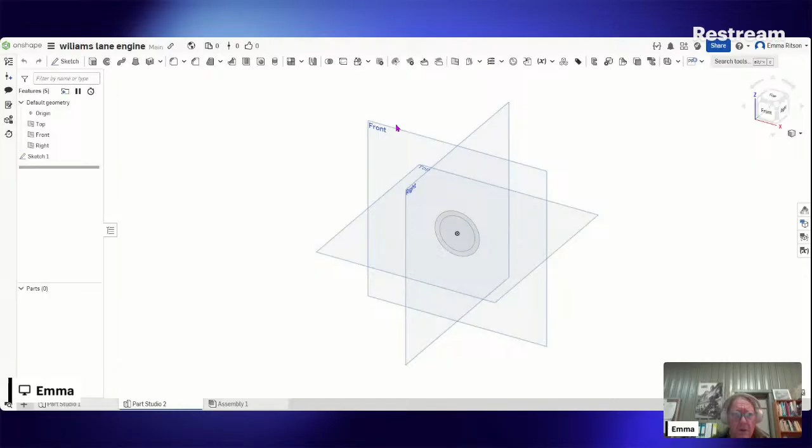Why hasn't that refreshed? We're not getting a refresh there. Why is it so? For some reason we're not getting a refresh here. Start with that, not sure what the story is there, but it doesn't seem to be refreshing nicely. It's a bit strange.

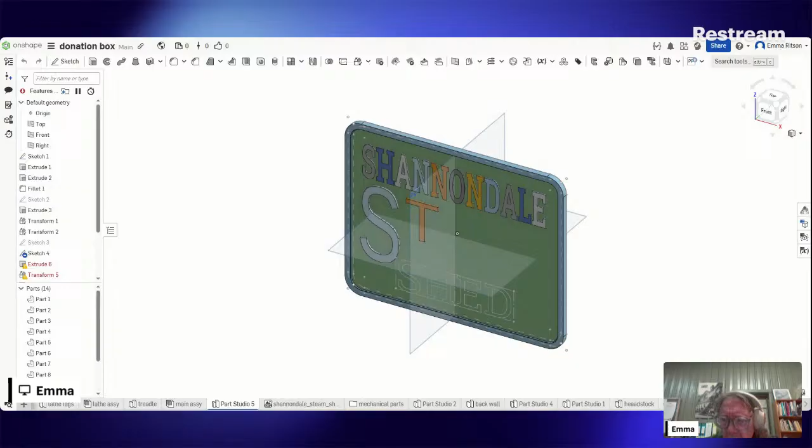Now, looking at it, we need an aluminium plate or brass plate or something on this box. I had some thoughts about it, and this was quite some time before we designed a logo for the Shannondale Steam Shed. I've sort of got this, which I don't really particularly like.

This is sort of the look that we're going for. What I'm going to do... I really appreciate you tuning in everyone, because this is sort of where I'm at, is that I'm struggling to get back into projects like this.

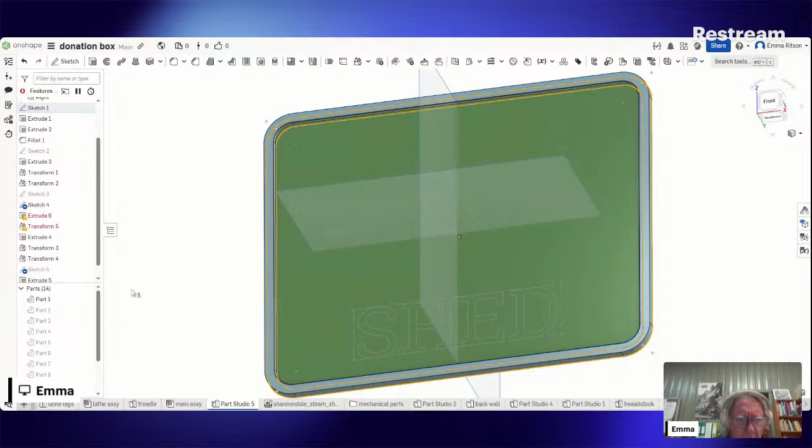I think if I do this, that's probably fixed it, has it? I hope so. I'm not making progress here at a rapid rate, actually, is what's happening. Hopefully I fixed it, I think we're all back where we started. And we got rid of the clicky sound, which I believe to be... hopefully the noise has disappeared.

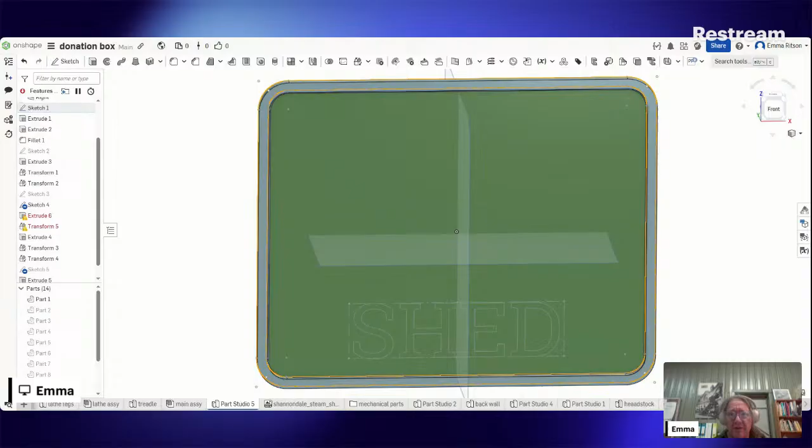Really appreciate you guys taking time to watch, because these are things that I don't get to. Now, we need a plate about this size, cast in aluminium, probably be nice enough, or brass maybe if we really were feeling fancy.

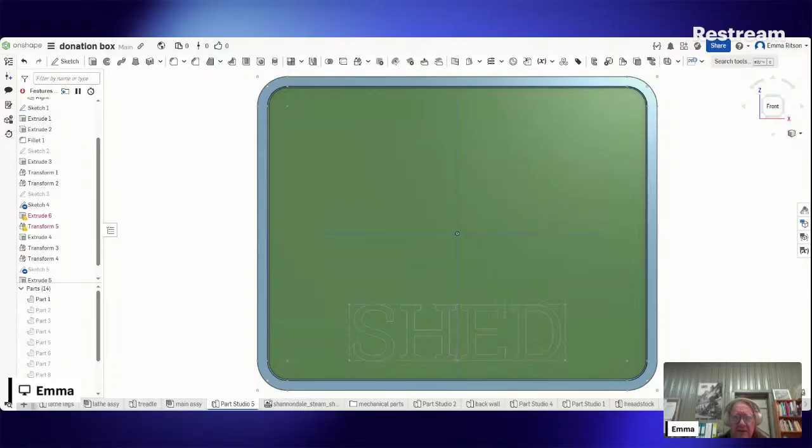And it needs to read Shannondale Steam Shed. Now, I had sort of thought to have sort of a sweepy, word art sort of style thing happening here, but in Onshape I'm not sure how to do that. What we're probably going to do is put another sketch here.

Sure, I like that on a plate that's sort of 6 inches by 5 inches or something like that. It's a very difficult typeface to actually mold and cast, I think.

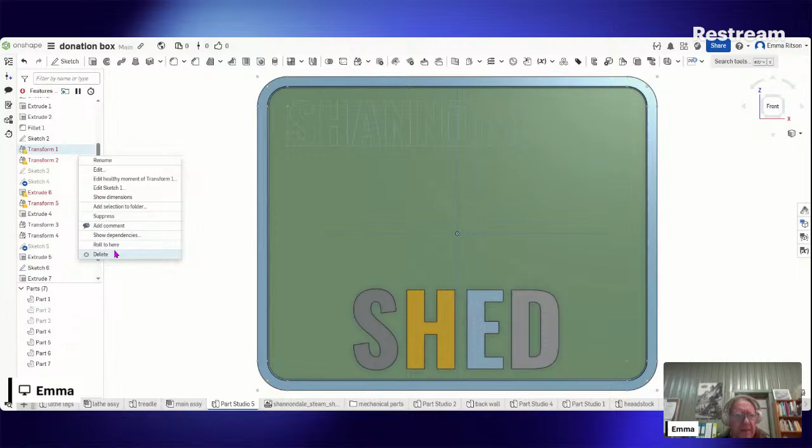Now this transform doesn't work anymore. We delete that, and that one. And if we extrude that sketch properly now, we start.

I haven't looked at this for quite some time. But if we select sketch 2 and extrude it, we only want it out like 2 mil or something, right? As new parts, that changes them all different colours, so you can determine that they are actually new.

And the reason I've done that is so that we can select all these parts here like this. Remember, if we select from right to left, it selects everything that's in the selection. So if I select this here like this, it gets all those things. And if I select from left to right, it only selects the things that are absolutely inside the selection. See?

We click transform. It's asking for a line or point to translate from, which we're going to start with that vertex. Translate, probably want to scale it from there, and click scale uniformly. And our Z scale, we go 1.3 maybe. And that is scaling it upwards, including this distance here, also 1.3.

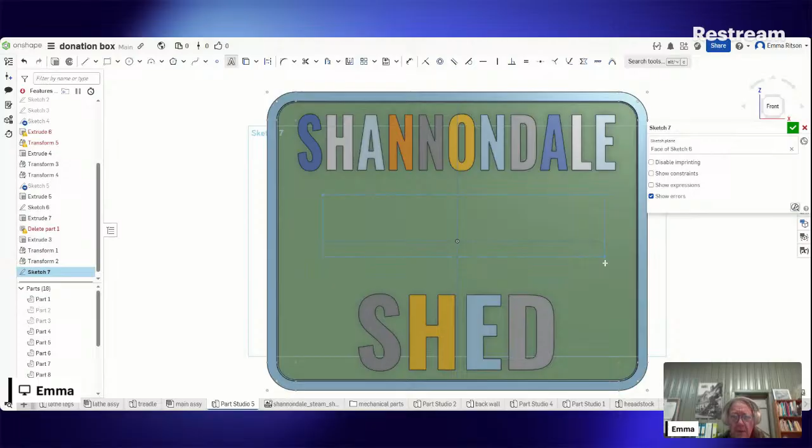I think that that's probably a fairly easy thing to cast, though. Now, what we need to do is put steam in here. So new sketch, we'll bung it straight on here. And we'll put text, something like that. We go STEAM. And in the same font, that's a bit boring, really. Not feeling it.

Just transform that to the center. Move that so that it's sort of on line in the center. That's not terrible. So what I'd like is a little bit more sort of class than that. It feels a bit sort of... feels a bit boring.

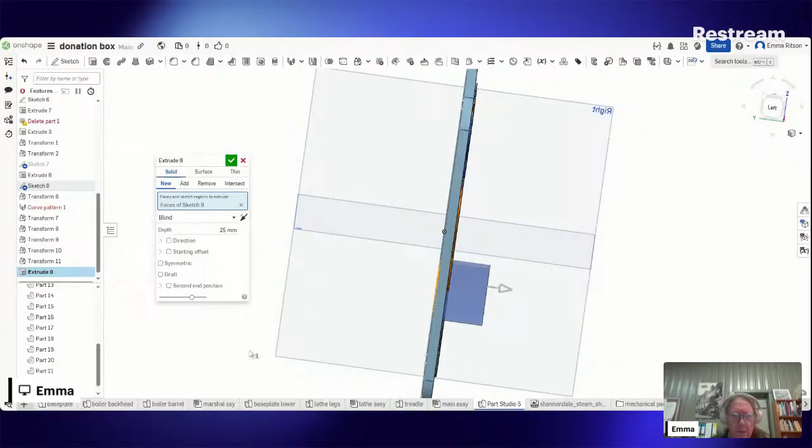TMB's already done one in AI, which is kind of cool. Getting it into a STL from AI is a little bit more complicated, I've discovered, because my first thought to do this was AI, absolutely.

So we use it basically as subtraction. Our tools is this. So we're going to take basically part 24 away from that one, that one, that one, that one, and that one. And there we go.

So it's done that, and it looks quite good, I think. I don't think that's terrible at all. This one here could be a fraction bigger, because S's tend to like to be a fraction bigger. That was transform 7.

Let's see if that makes a difference. What it's going to do there is put a flat point on that, which isn't really good. So if we do this, and targets, which is part 19, if we remove part 19 from the targets, that looks much better.

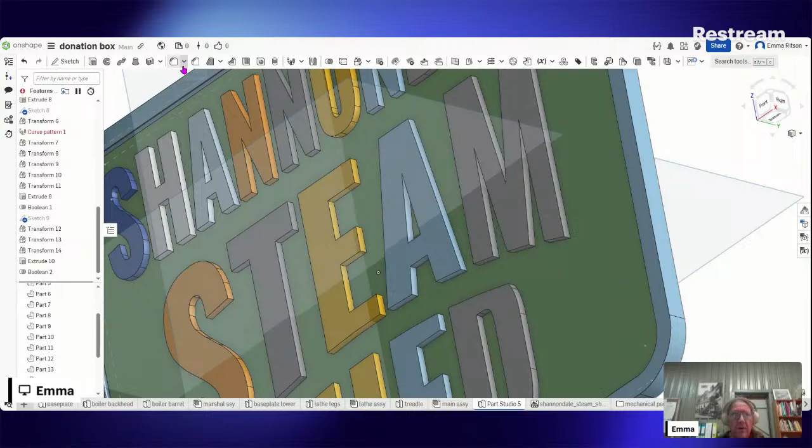It's not ideal, but because these are no longer text, we can modify them a little bit. So here, what we can do is put a fillet on here. It's probably as good a time and place as any.

We can't do it that way. So we need to put a bit of a curve in here. So a new sketch. Our sketch plane is going to be, we'll just do it this way. We're going to the front sketch plane. We can select it there as well as we can click on it.

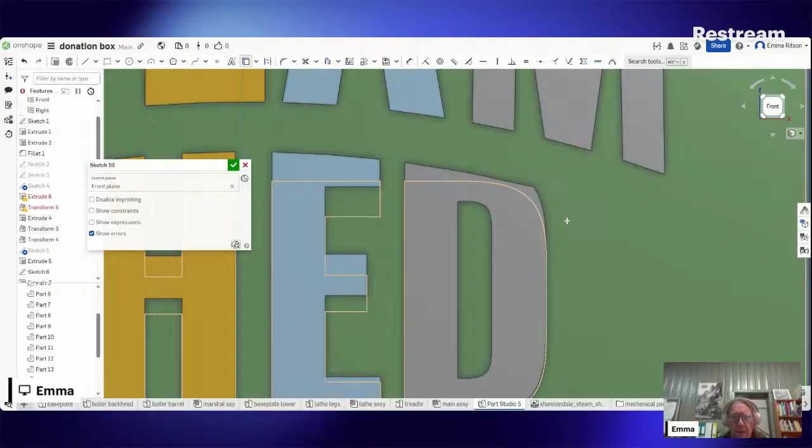And we use... which we can't do for some reason. Anyway, that's all right. If we go up here like this, and we're just guessing here because it'll be close enough and there shouldn't be too many issues with it.

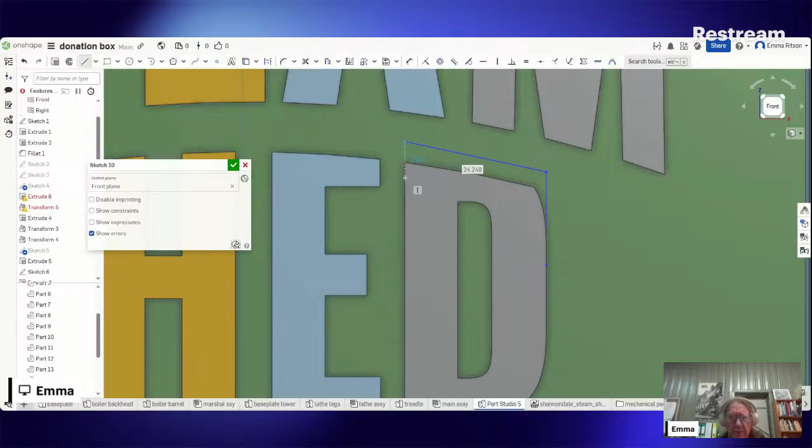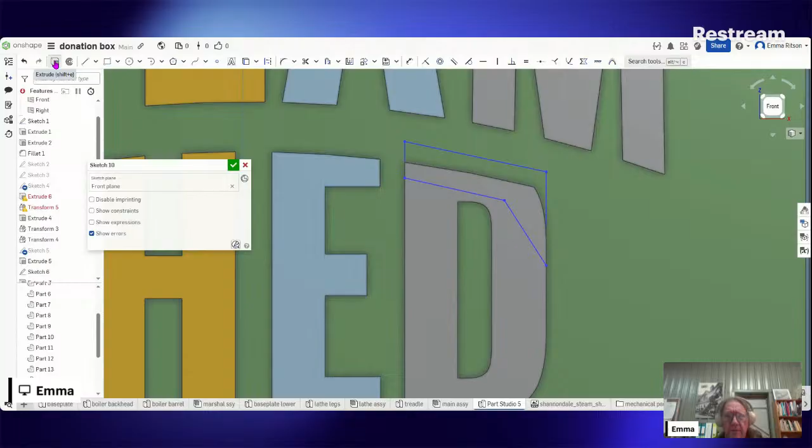We make a shape like that. And we extrude it. That didn't work. Why didn't that work?

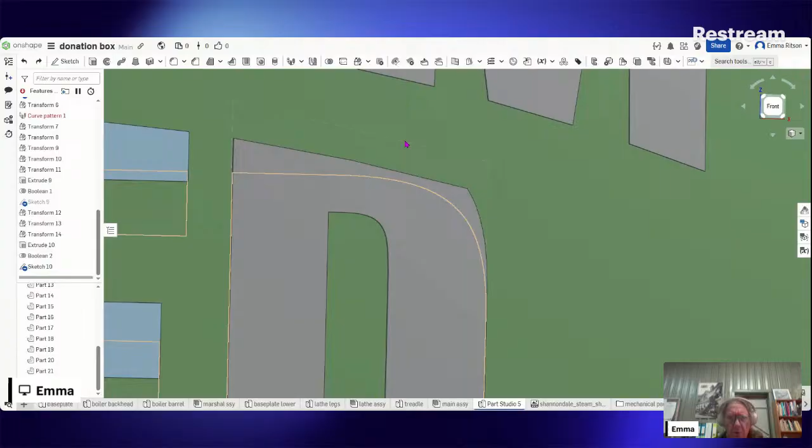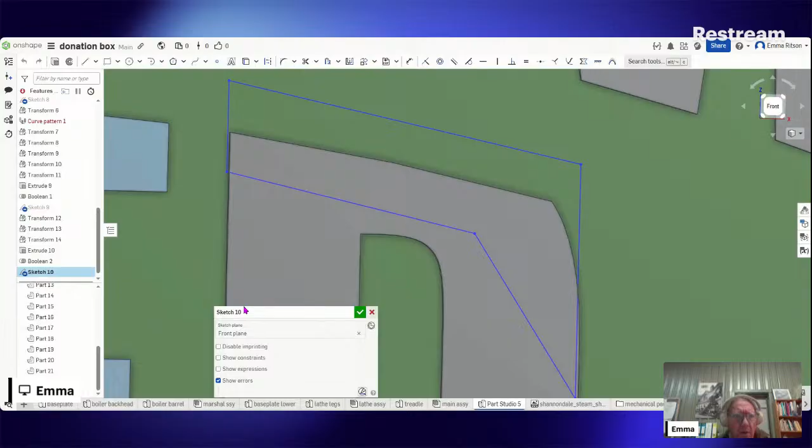There's sketch 10. Why is sketch 10 not joining up? Yeah, it doesn't join up there. Let's have a look. I guess there's someone still watching. One of these doesn't join up properly. It's not good, and we're going to start this again.

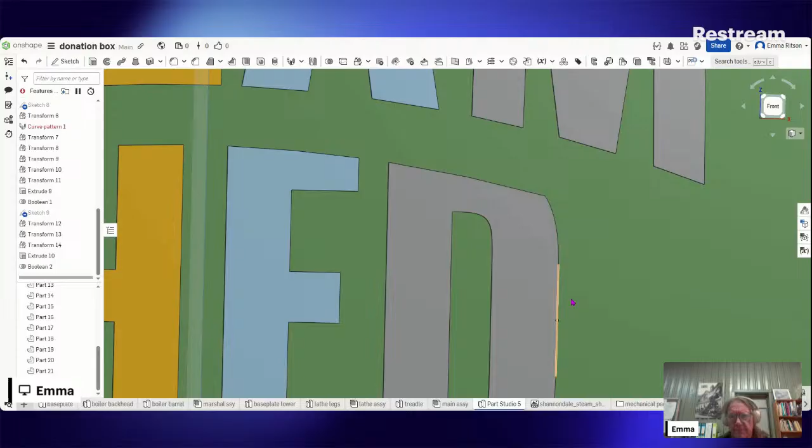What we need to do is put a square corner on here so we can put a fillet on it. If we go on the actual face of that extrusion, that might make it a little bit easier. It does too. Look at that.

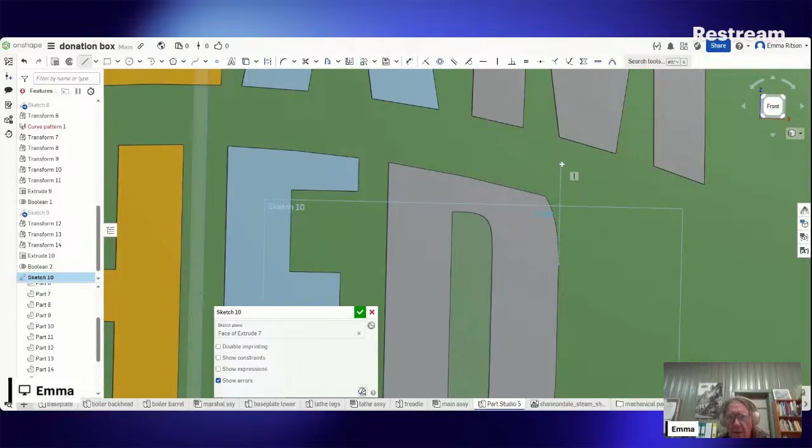There we go. Now we can extrude that. What we find is that it's probably going to extrude out the front rather than the back. You want it 2 mil. We can change the direction with that little arrow.

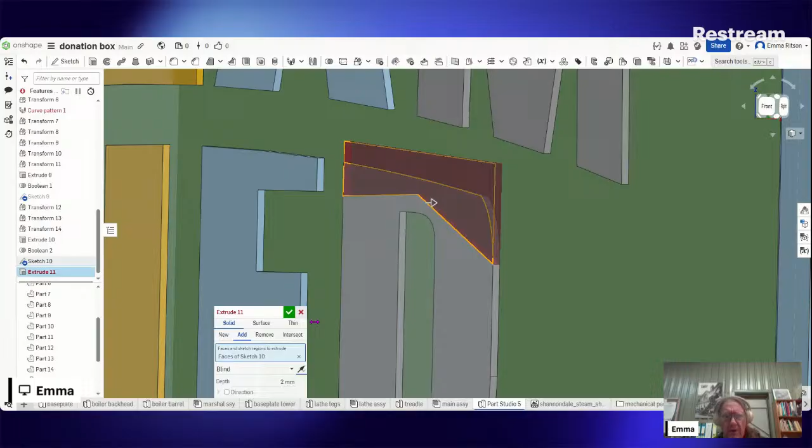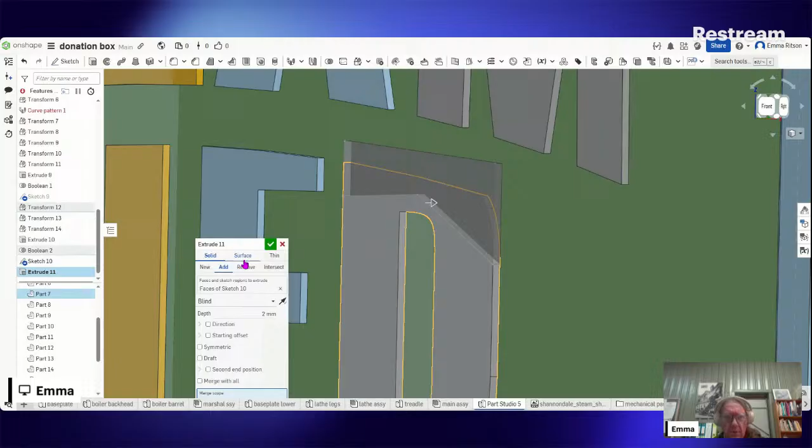Add it to that. And let's fix that. Now, that makes perfect sense, doesn't it? However,

this one here, if we drag this down here past this—there you go—that makes our cutoff later in our sequence of events than our actual masked extrusion. So that fixes that.

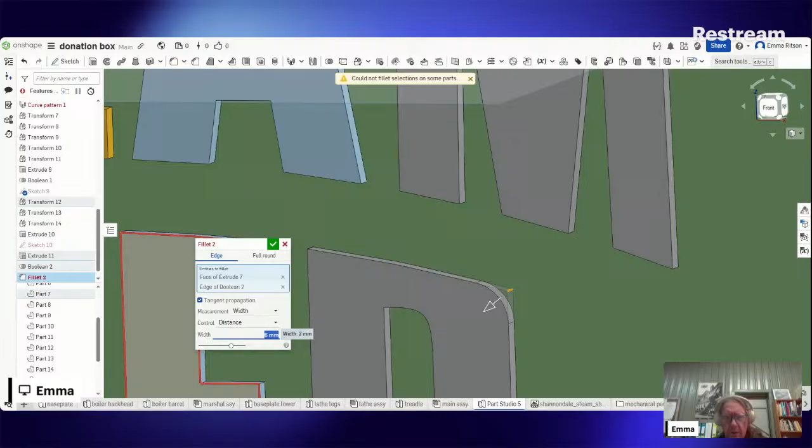And then all we need to do, I believe, is put a fillet on here. Let's have a look at this at the front, see how much it needs. So that's that.

That's interesting. Yes, I can make all the letters the same colour, but the reason they are different colours is that each letter is a separate piece, and that's to determine which part's which.

If we, because we've got this sorted to the point that we kind of like it, we could experiment with that. So basically, we can change them just by changing the colours.

Appearance panel. So we can use the appearance panel here. And we can change them all to grey if we like.

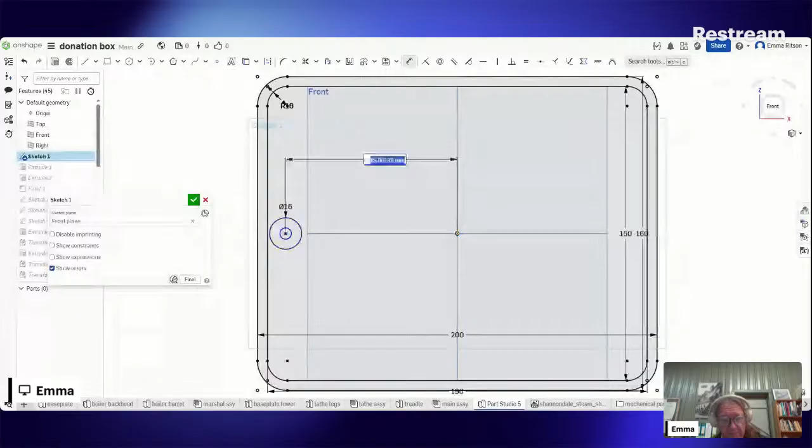And put some dimensions on that. So distance from there to there, I reckon it's 80. Let's see how 85 looks. There we are, that looks good. Might be a bit much.

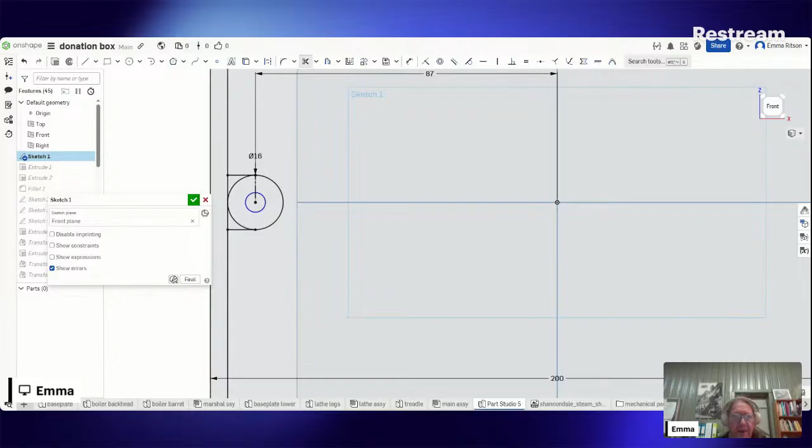That's better. Now if we draw from, put a construction line from the centre of this hole up to this line. Press Q, and then we mirror that. Our mirror line is going to be that one. There we go. Use the trim tool, remove that and that and that.

And then radius is this one. And this one. I reckon 6. Seven maybe. There we go, 7. Let's try with 7.

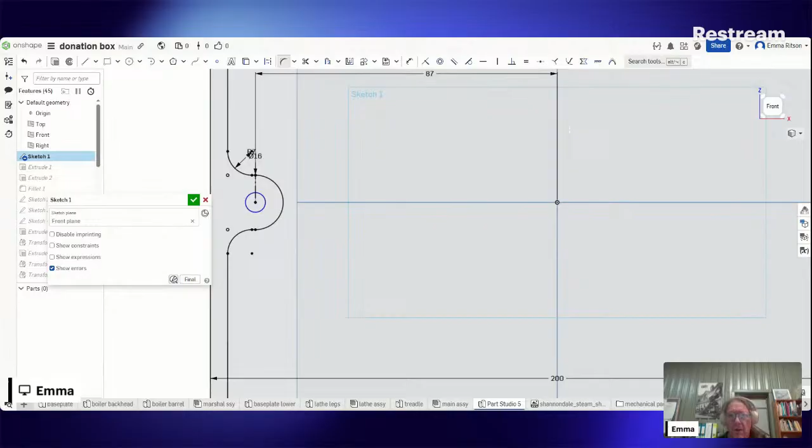Now, let's do some mirror work here. We'll get a mirror there. That one, that one, that one, and that one. And there's 2 little lines in between that won't add up if we don't do that.

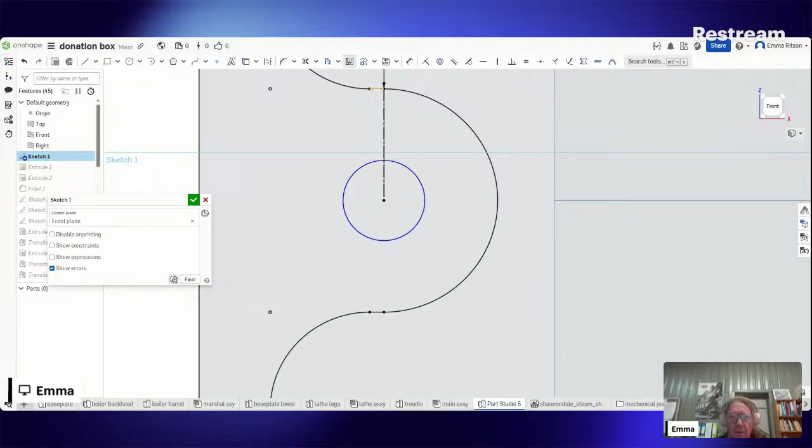And we trim the space in between this one here. There we go. And click OK. That should nearly do that on its own.

But wait for it, and wait for it, and wait for it, and wait for it. It annoys you that the centre of each word is not aligned.

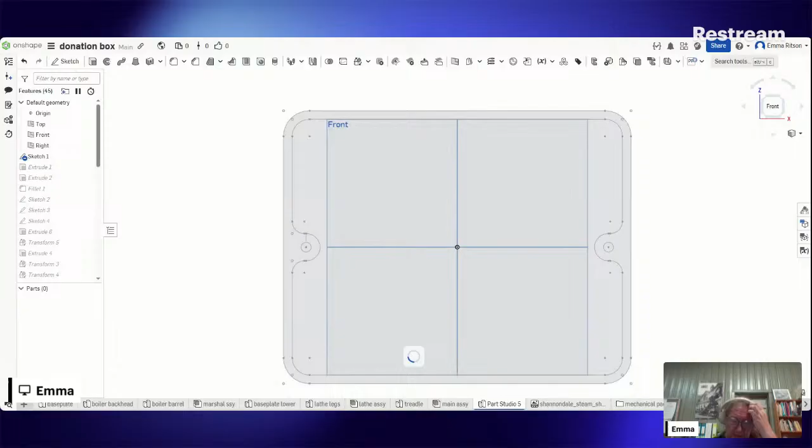Thanks for that feedback. I might have a look at that in a second when we've done this. The centre of each word is not aligned. It's very true. It's because one has 6 letters, one has 4 letters, and one has 11 letters.

Interesting. I wonder what we can do about that. I don't think it's going to work because of our kerning. I just don't think that there's anything we can fix. I don't feel like it's something we can fix.

If we squash down the T and the E and stretch out the A and the M, it's going to look ugly, I think.

No, I'm going to have to sleep on that because you're right. T and B actually absolutely has a point. And now I've seen it, I can't unsee it.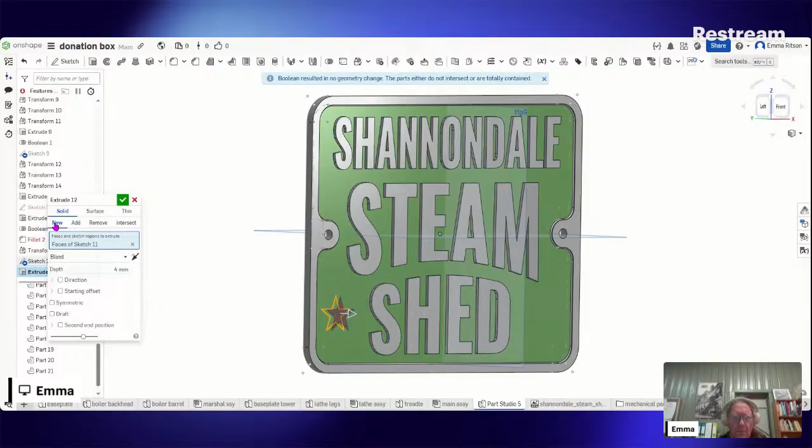Now, this very cool message just popped up. From Matt.

There we go. I'm gonna read that out loud. Just booked for flying out 7th of January, back the 4th of February. So he's here for a month. Vague plans of helping a friend build a carport. So Matt Peterson is coming back to Australia, which is a bit awesome. Caught up with him last time he was here. Be pretty excited to catch up with him again, if that's something that happens.

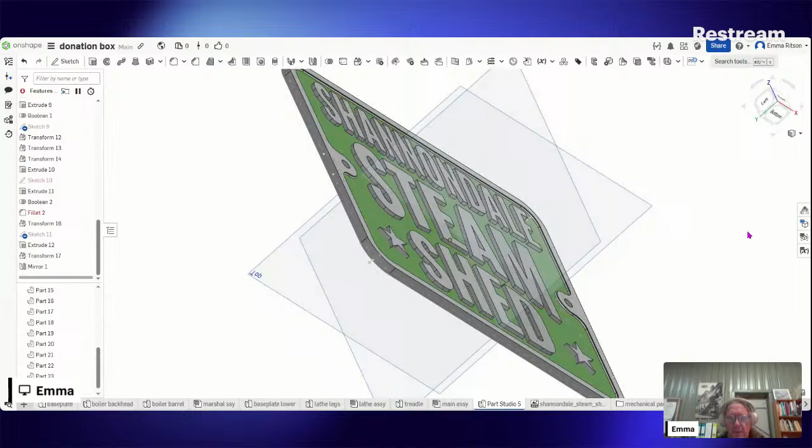So do we like that? I don't know. If we transform, we can do that quite simply. To translate X, Y, Z gives us a little arrow. If we drag that to the top above that mirror line, that changes the other one as well. Now, don't know, do we like it? I think that probably serves very well, and it's probably simple enough and quite good. Don't know.

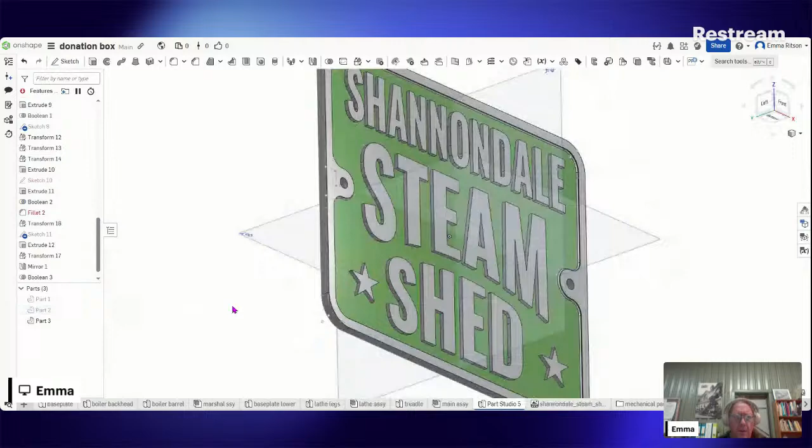If we make basically a union, by selecting everything, and joining them all together, that makes everything one. Come on, my stupid mouse is going to play up now.

The letters are actually extruded further than the actual outer surround, which when you're looking at the bottom, you can see that. It's a fairly simple fix.

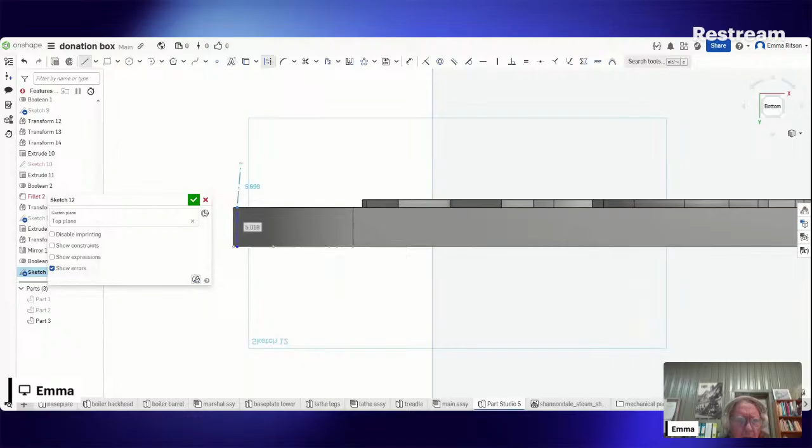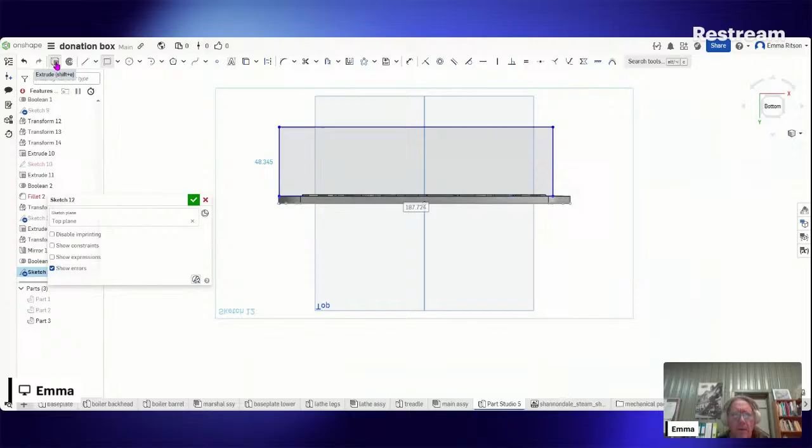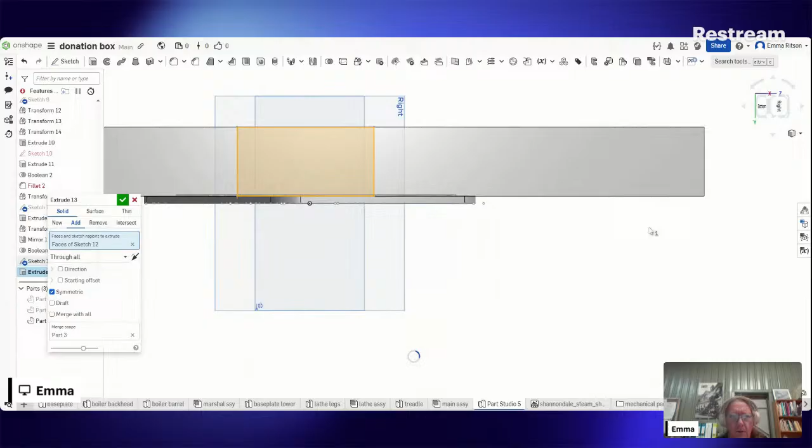It's actually 5mm thick, so we draw a certain box there and extrude it. And we select, instead of blind, we put through all. And we have symmetrical. And we go remove.

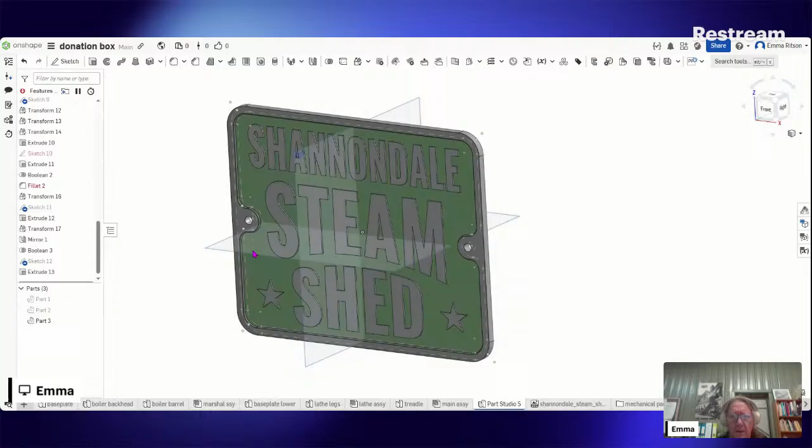Part 3, click OK. Yeah, that's brought everything down to where it needs to be. It's a fairly low relief, but it will cast really nicely in aluminium.

Probably it needs, ideally, a fillet around all those letters. You could add a texture to it, absolutely. That might be really nice. It will have a sand texture anyway, and that might do.

If we were to do it on the CNC router, which might be an easy way to do it in aluminium if we really wanted to, then we could put a texture on it then, but it's a bit of overkill.

I'm probably been up nearly 2 hours later than I should have been, but that might be what we work for, and it's got that sort of carnival-y feel to it, and it doesn't have to be particularly formal on the donation box. But if we got one of them cast in aluminium, I don't think that'd be a terrible thing, and we could just screw it straight to the box.

So to cast it, of course, in aluminium, there are things that it needs. It needs some draft on it, probably. It's only 5mm thick, but like Peter says, it probably needs a little bit of draft on it. I don't think the letters, being only sticking up about 1mm, really need any - I think that'll come out beautifully. But the outside on it probably needs a bit of draft to come out. We'll probably fix that fairly quickly.

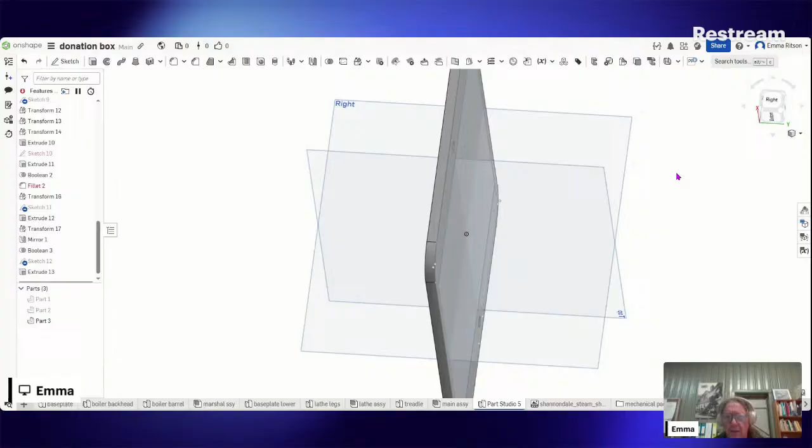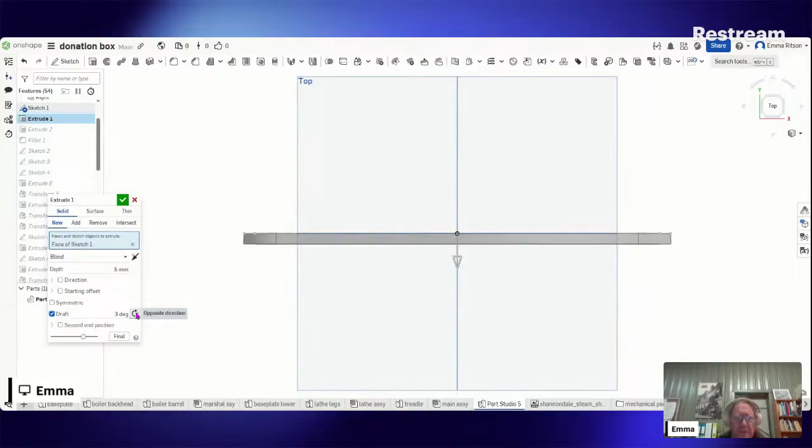If my mouse plays up... Let's Extrude 1, so let's edit that. And we can select draft here. And we don't want it that way, we probably want it this way. Is that right? Is that the right way around? Yeah, let's put a bit of draft on that. Simple as that.

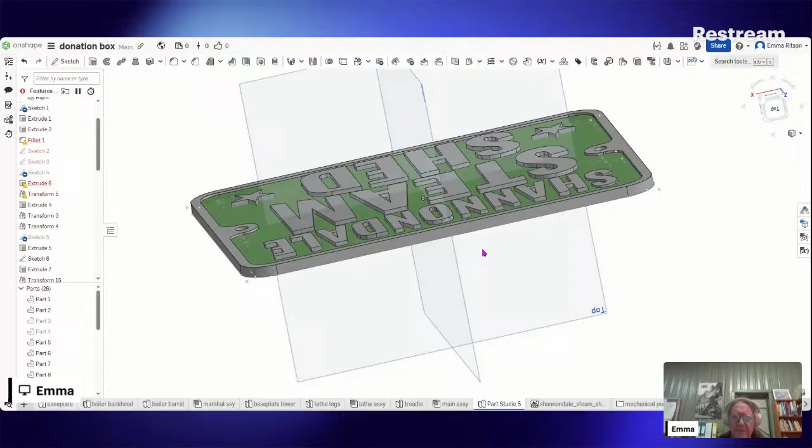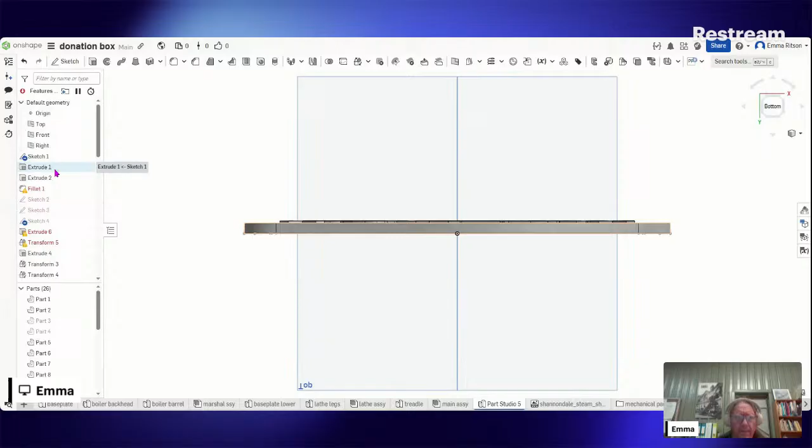What it also has done is mixed up our second extrusion for some reason. It's got a bit of draft on it, it's mixed up quite a lot. Let's edit that and put a little bit more than 3 degrees - put 5 on it... 6... 7, I think I'm going to go with 7.

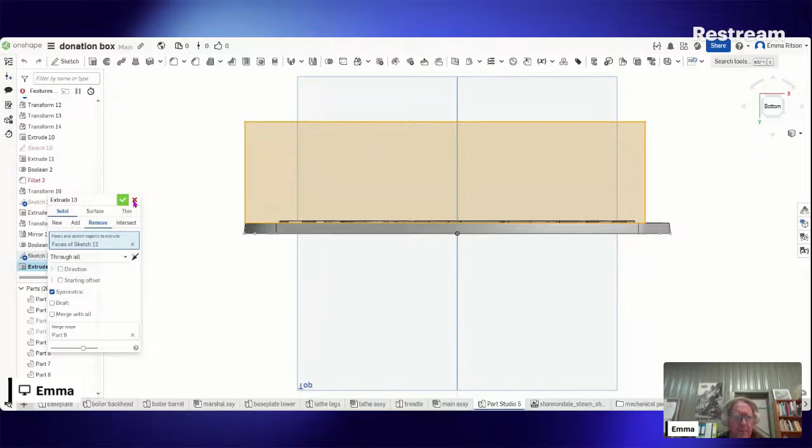Wait for it. But because we've changed it, something's messed up. Yep, it's this one.

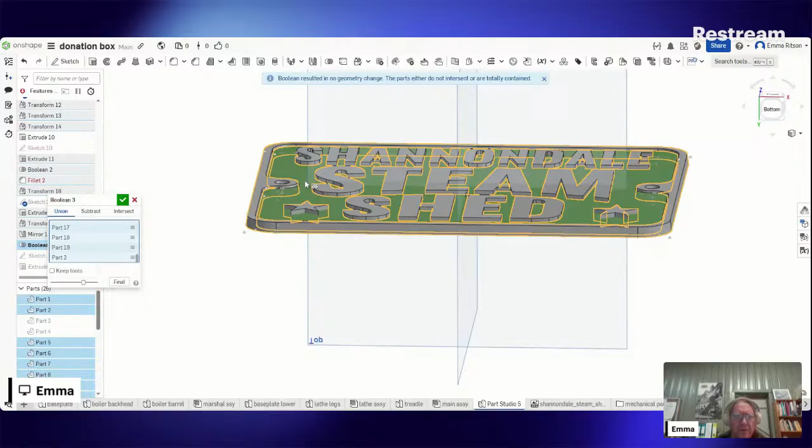Why has it done that? That's part 9, part 14. And we've got this part here that's not part of it. There we go, let's fix that. There we go, and let's fix that itself.

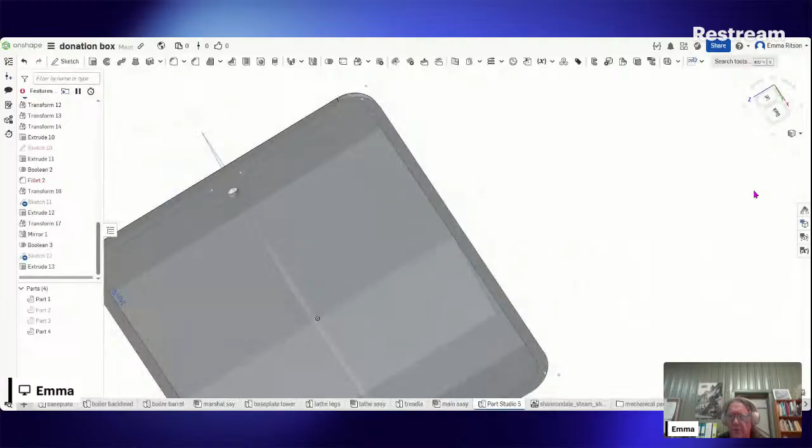So basically we put a draft on that. And let's look at the front of it. There's going to be a lot of this happen now because my mouse is starting to play up - my trackball touchpad's starting to play up.

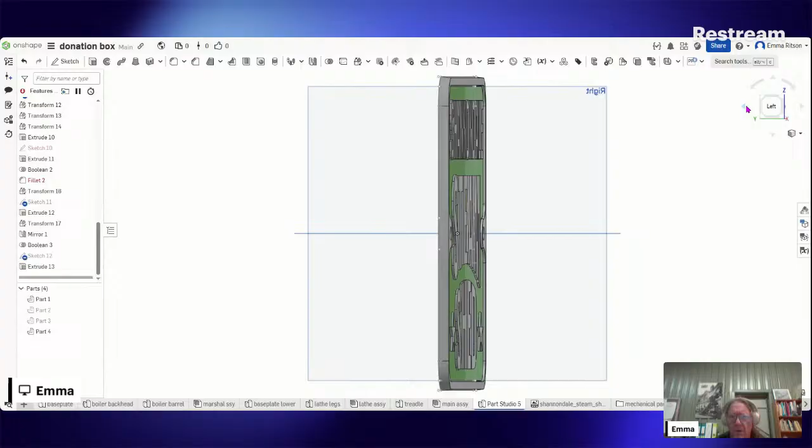Anyway, that's got a bit of draft on the outside, which is really what it needs. I think that'll mould quite nicely. I'm going to call this done. Because that's only sticking out about 1 millimetre past the relief, I don't think that'll have any problems at all moulding. I really don't think that'll be an issue. I think even in brass it might not be too much of an issue - it would mould quite nicely. It's quite thin for its size, but I don't think that'll be a problem.

Anyway, next couple of weekends I might get one of them made and put on the box. But we need to print it first, and to be honest, my printer's still in Brisbane, so we'll see how that happens.